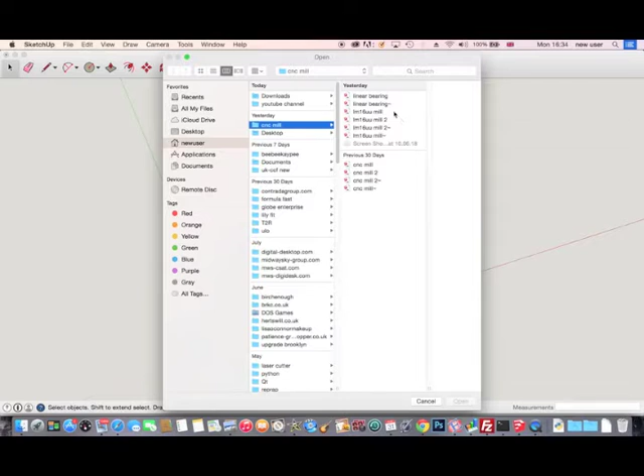Now this isn't a universal method for transferring any 3D design from SketchUp to a laser cutter. You do have to use your imagination to work out how acrylic sheet is going to fulfill the function you want it to. So there's no magic wand to wave at that stage.

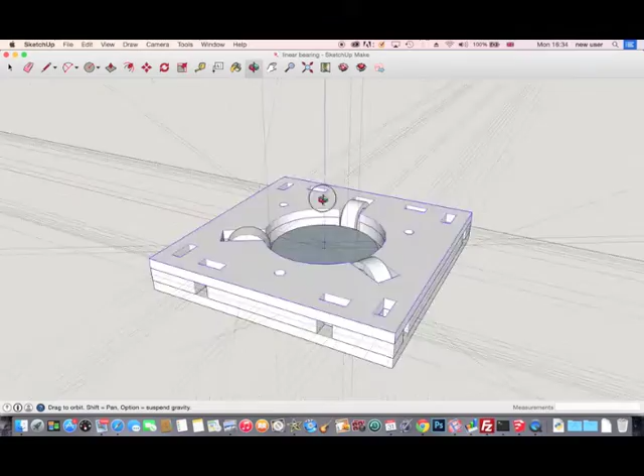What I've got here is a 3D design composed of three different components, each of which corresponds to one layer of acrylic in the finished design.

So what I've got to do is transform each of those three components corresponding to each layer into a 2D drawing. So I'm editing the component now, and the next stage is pretty tedious. I haven't found a better way around this yet.

What I'm doing is holding down the Shift key and manually selecting each line that makes up the top layer of this component. I wasn't going to make you watch the whole of that, that took a minute or so. And now I'm just checking that all of those lines are selected by orbiting the component.

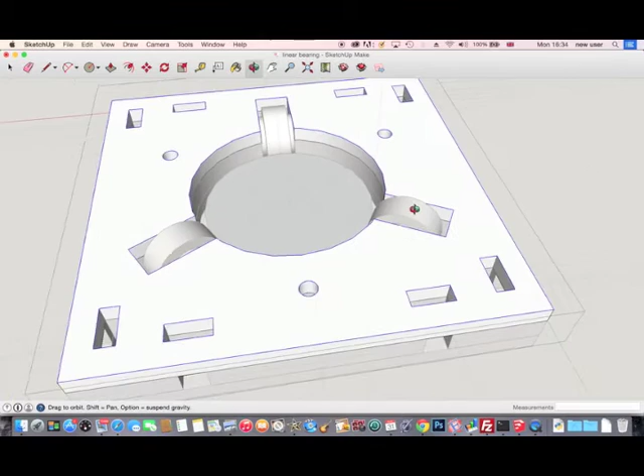The next thing I'm going to do, now I'm happy with that, is go to Edit, Copy, and then create a new SketchUp file.

Just delete the default object there. And then I'm going to paste it and move it to the origin. It tends to kind of click to the origin so you can make it exact.

I'm just going to save this down. You don't necessarily need to save this stage, but it's probably a good idea.

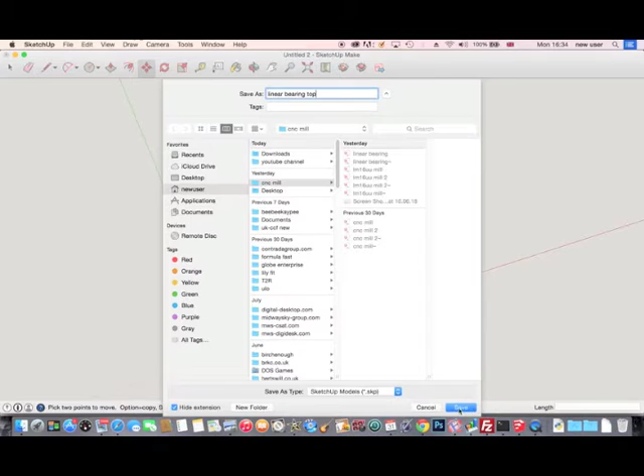Once that's saved, I'm going to use a plugin, which I will link in the video description, that lets you export to DXF, choosing millimeters and polylines as your options.

For some reason it puts untitled on the end of all the file names, so I tend to just delete that.

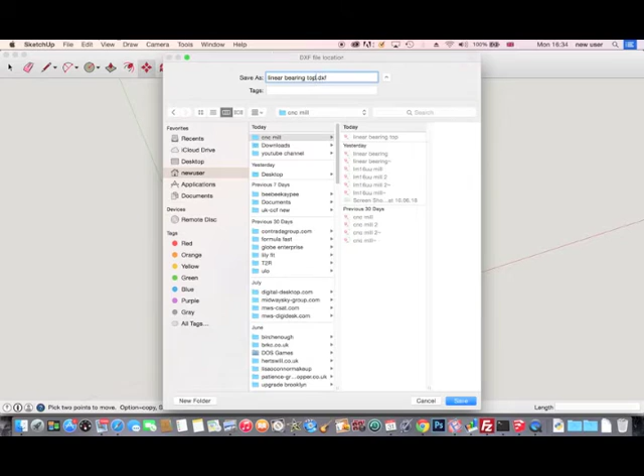I've written linear bearing top just so that I remember which layer that is. So that's now a DXF file.

I'm going into DXF to G-code, which I've modified in certain ways. I'll also go into that later on.

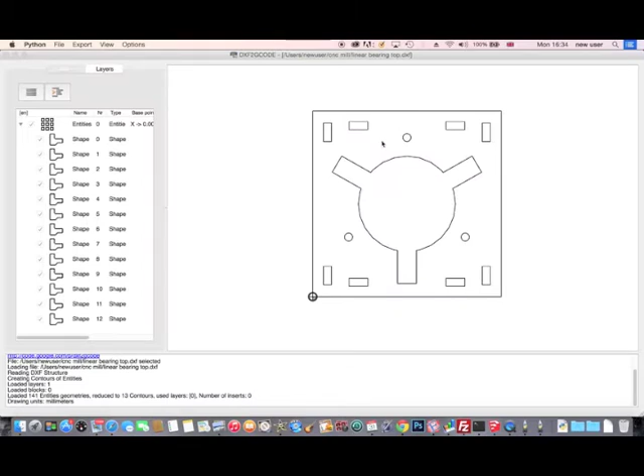Just going to find that file that I just created, the DXF file. The most important thing here is I need to find the outer cut, the sort of square around everything.

It's important for the laser to cut that last, because if it cuts it first or midway through, the square can fall out of the main acrylic sheet, and then the inner holes will be misaligned within that.

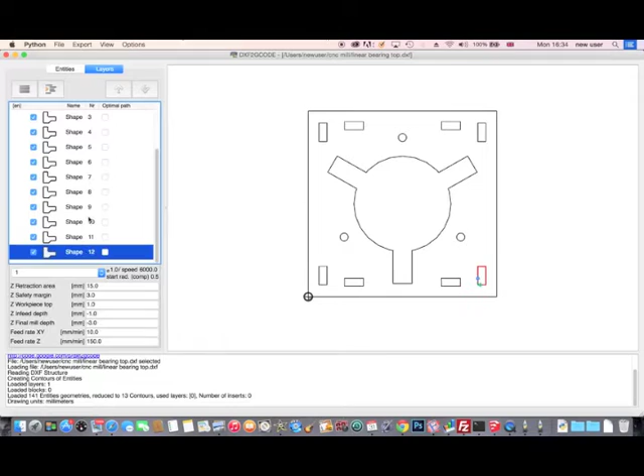I'm just looking through the layers browser. Each one highlights to show you which shape corresponds to what. Okay, so that's the outer square I found.

I'm just moving that to the end of the list to make sure the laser cuts that last. And now go to Optimize and Export Shapes and save down your .ngc file.

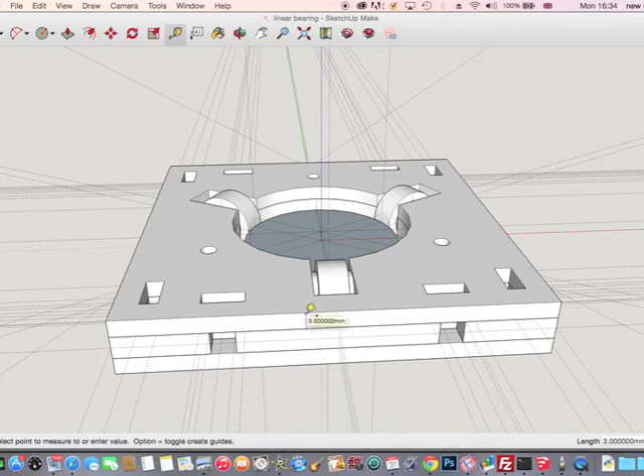Now in the drawing, the top piece of acrylic is 3mm thick. So I'm going to get a piece of 3mm acrylic from the store and put that in the machine.

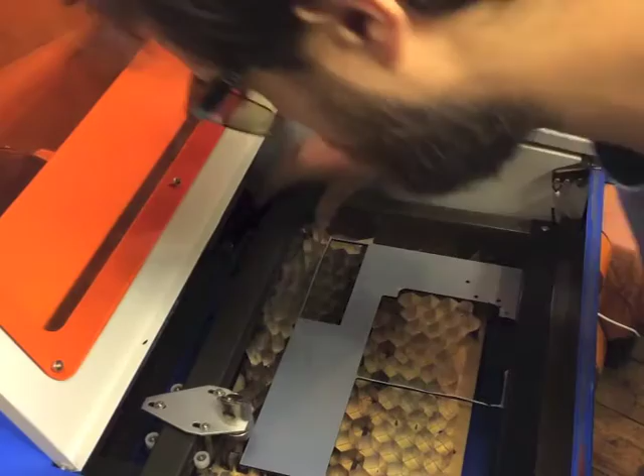I found that a useful guide to getting the acrylic in the machine straight is to use either the top or the bottom bar of the support for the axes themselves. That way you know the acrylic is lined up straight relative to the cutting head.

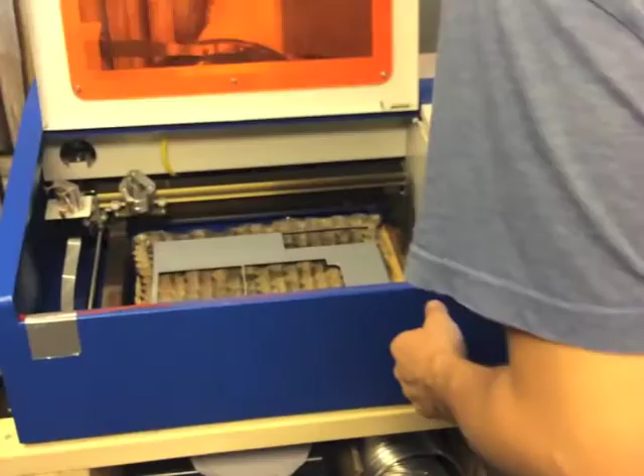Once that's in there, I'm going to move the cutting head into position by hand. The laser will start cutting at the origin in your SketchUp drawing, so you want to line the laser up with the top left corner of where you want the drawing to start.

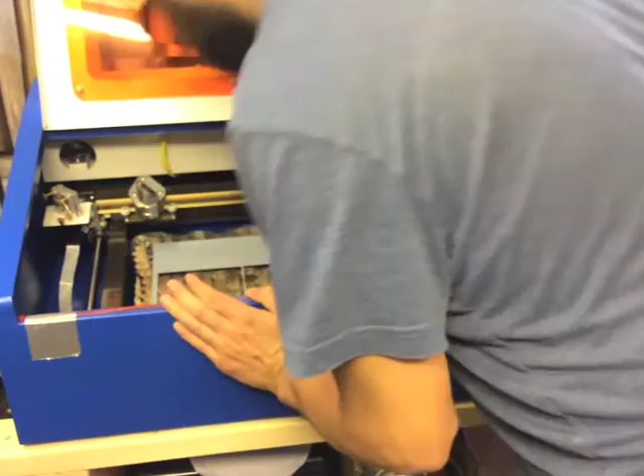You can do this by firing small test dots with the laser on low power and gradually moving the cutting head until the dot is as close to the top left corner of the acrylic as you can get it.

You can see that before firing the laser, I always shut the lid of the machine. I fitted a safety switch to make sure that the lid must be shut before the laser fires, but that switch isn't present on the standard machine, so all the safety precautions are up to you.

Here I'm loading the file up into a program I use called Pronterface, because my laser cutter is converted to run on Arduino, which I'll go into in a later video. There's a lot to that.

But as I said, this will work on any laser that uses G-code and uses the G0 and G1 commands to control whether the laser's off or on. And I'm afraid that you'll have to find out what your laser cutter runs on.

I'm not really sure how you would do that, but I'm sure that manufacturers' information will tell you exactly what sort of G-code it's using.

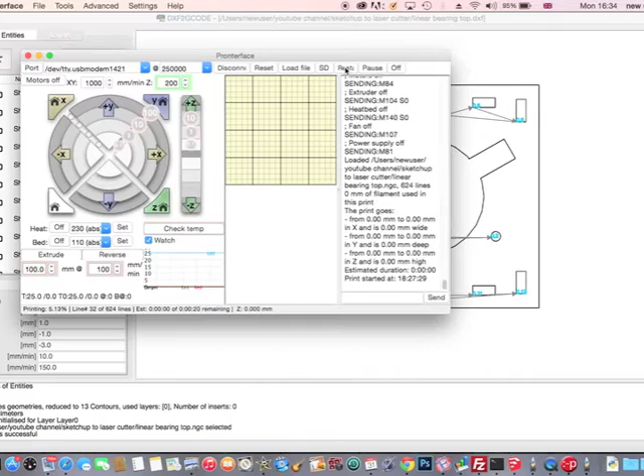As soon as I pressed that print button, the laser started cutting. As you can see, it's moving quite slowly, only about 2 millimeters a second with the laser set on relatively low power. I found that doing 3 passes over each cut, moving slowly and on low power, is the best way to get edges perpendicular to the surface of the material.

It's possible using a 40-watt laser to go through 3 millimeters of acrylic in one pass, but the edges are usually quite slanted, by up to 5 or 10 degrees, whereas using 3 passes at lower strength seems to get fairly perpendicular edges. They're not perfect, it's not a professional quality machine, but they're pretty good.

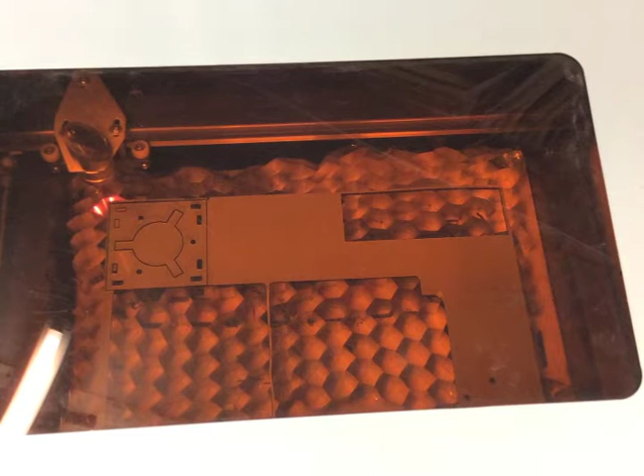I just skipped over a few minutes of cutting there. As I said, this isn't a professional quality machine, and I probably could get this to cut faster if I wanted, but at the moment my priority is quality, and I'll gradually tune it up as I use it more.

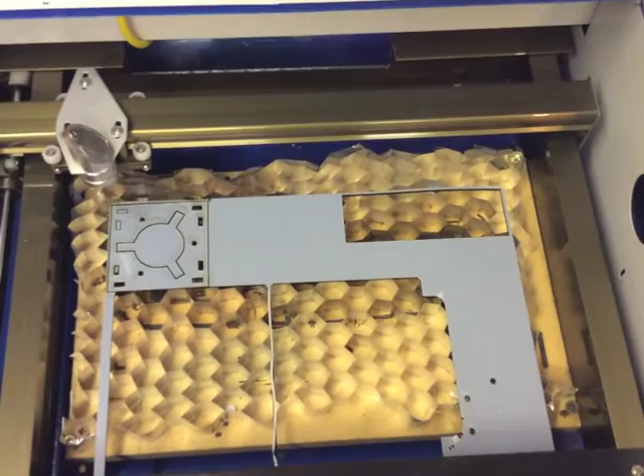So there's the final piece, and I think it's a pretty good copy of what I had in SketchUp. Now, if you were looking closely when I took that part out of the machine, you'd have noticed that a couple of those nut traps weren't cut out fully.

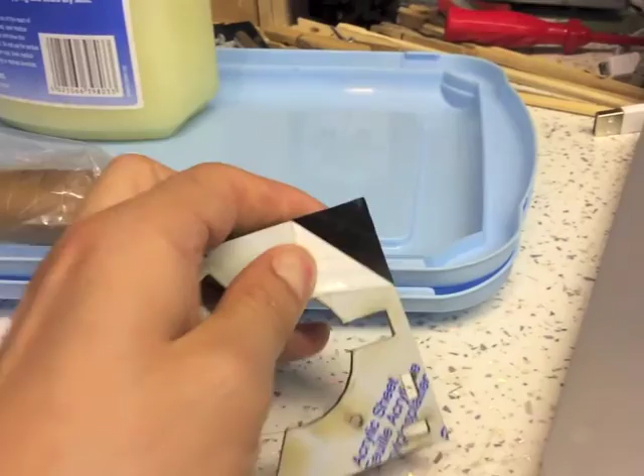That's because I was actually tuning up the machine for this particular thickness of acrylic as I was printing. That's not recommended, I would always do a test piece. But now I've found a good setting for the laser strength for that particular thickness of acrylic on this analog dial, I'm just going to make a note of that for later.

I'm going to upgrade the firmware in the Arduino soon so that I'll be able to program in the laser strength precisely and vary it during each G-code file. But for now, this will do.

I promised about 3 minutes into this video that I'd explain a little about how I modified DXF to G-code Python scripts to work with my laser cutter. I'll include a link to my modified script in the description of the video, but I'm just going to explain a little about how I changed it, which might help you if you want to cut different thickness of acrylic or different materials.

The 2 parameters in this script that you'll need to change depending on the material you're cutting are the feed rate and the number of passes. The depth coordinates control the number of passes. If you set axis slice depth to -1, axis mill depth will control the number of passes you do directly, so for -3 you'll get 3 passes.